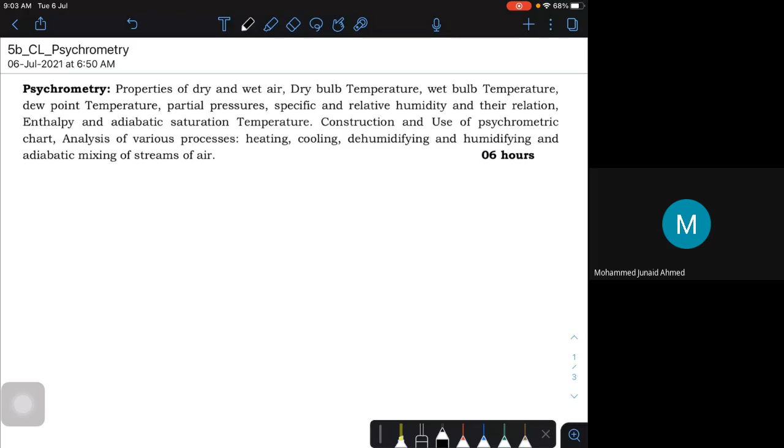Sir, air conditioning is reducing the temperature of, say, a space like a room; I think it has to do with the humidity, but I'm not exactly sure. Okay, fine. Maybe you are partly correct. Let me put it like this. What is air conditioning? Let's try to define it as simply as possible. Some important definitions. Air conditioning: what is it?

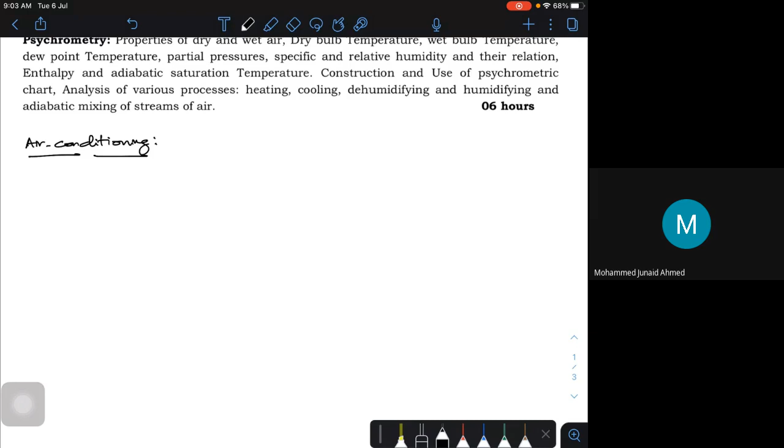It is the method of controlling the temperature, the first part. Then humidity, the second part, and also the purity of the air, how pure it is. You might have seen that sometimes we add something to purify the air. And the motion of the air, that is, the movement of the air.

Where exactly? In an enclosed space, independent of outside conditions. Look at this, I have tried to define it as simply as possible. If something is happening outside, it should not have any effect on the inside temperature or inside conditions. Many feel that only controlling the temperature is air conditioning. That is maybe partly true.

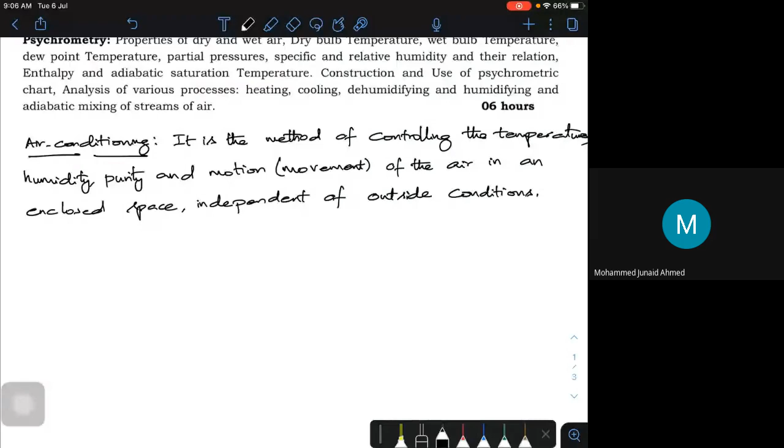For example, if I sit in one corner of an air conditioned room, the cool air should not be confined to that particular spot. The air should move throughout the room, independent of the ambient or outside conditions. All these things put together we call air conditioning, and the method of doing this is called psychrometry. So what things does an air conditioning system need?

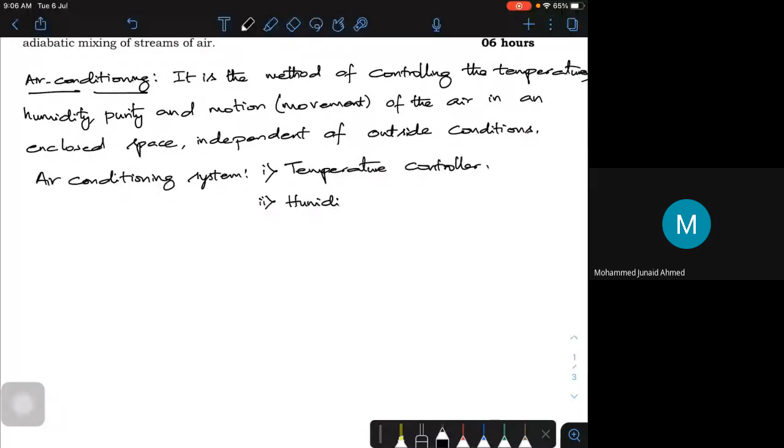An air conditioning system should have, first, a temperature controller, and second, a humidity controller. All these devices should be installed. Then air movement: an air movement controller, some kind of blower or fan. For purity, what do I need? Some kind of air filter for cleaning and purification.

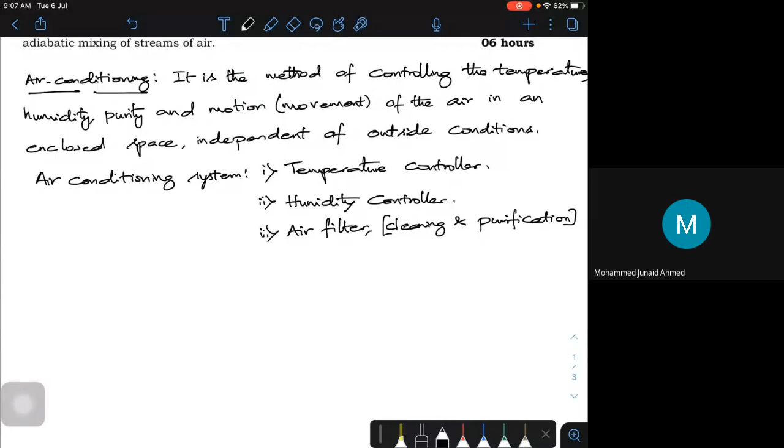A complete air conditioning system should have all this. Only then can I feel the comfort of that particular place. That's why air conditioning is called human comfort. It's not for everyone; whoever wants it can have it. Now let's look at the air conditioning system. I have a simple picture here of a simple air conditioning system.

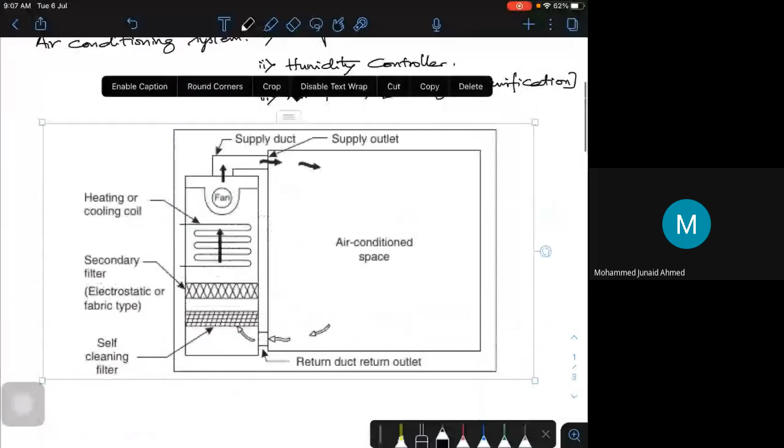Look at this. It's a simple air conditioning cycle. Look at the arrows. It has a filter from where air will enter. But one filter is not enough; it has to be filtered further. Further filtration is required, that's why I go for a secondary filter.

It may be an electrostatic type, or it may be a fabric kind of thing which will try to remove as much dust particles as possible.

Then the purified air will go through a coil. Inside the coil will be the refrigerant. Usually earlier we used to use R22.

Now there is a fan. The cooled air is taken through a fan and given to a duct, and the ducts are placed inside your air conditioning space. This is a simple thing.

Then you are not allowing that air to escape. If you try to allow the air to escape, you pay the penalty, you have to pay more power. What we try to do is take the same air through the return duct and do this cycle again and again.

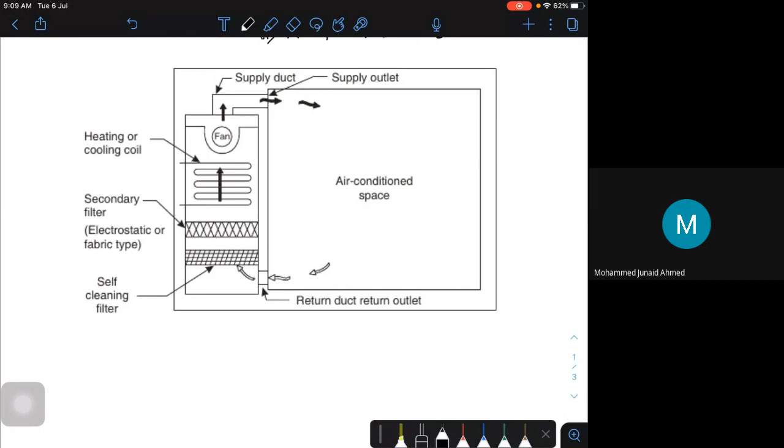If I want to explain this air conditioning cycle, this is a simple air conditioning cycle. Let me explain this. A simple air conditioning cycle. These are its components.

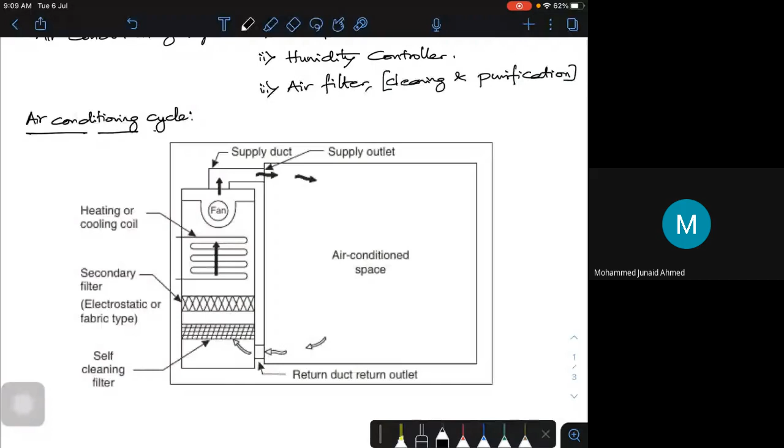The fan forces the air. We have a small fan which forces your air into the duct. That is connected to, maybe you have several openings in your room. These openings are called, if you have visited any centralized air conditioning plants, terminus or terminals or air conditioning duct outlets. So the duct was it.

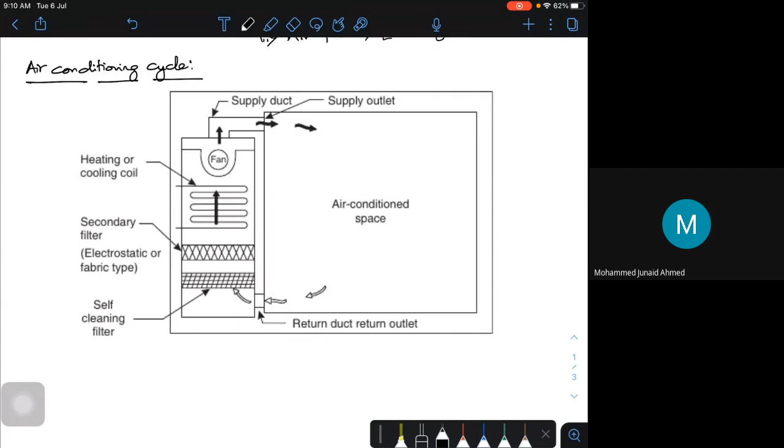That's why whenever we go for air conditioning systems, our ducts have to be properly designed so that there is no obstruction to the air. The air has to be easily circulated. So if you have a large room, I should have enough duct spaces so that local cooling doesn't happen. The movement or motion of the air in that particular space is more important.

So what are the things which are important? The filters, which purify your air again and again repeatedly. That's why if I have an air conditioning system at home, after 3 or 6 months, I have to put a filter. I'm going to change the filter. They are something like consumables actually.

These filters, nowadays made of nano carbon kind of air filters, after a particular amount of time or particular cycles of use, these will wear, and the air filters have to be replaced again and again.

Now when you come to the heating or cooling coils, if I'm in a colder country, I will go for heating, because of the room conditions. If I want to maintain the room temperature around 20 to 22 or 25 degrees Celsius, and the outside temperature is 45, the air has to be cooled. If the outside temperature is minus 2 degrees or so, the air has to be heated. That's why air conditioning is not only cooling, but since we are in a tropical country, we are going for air conditioning as cooling.

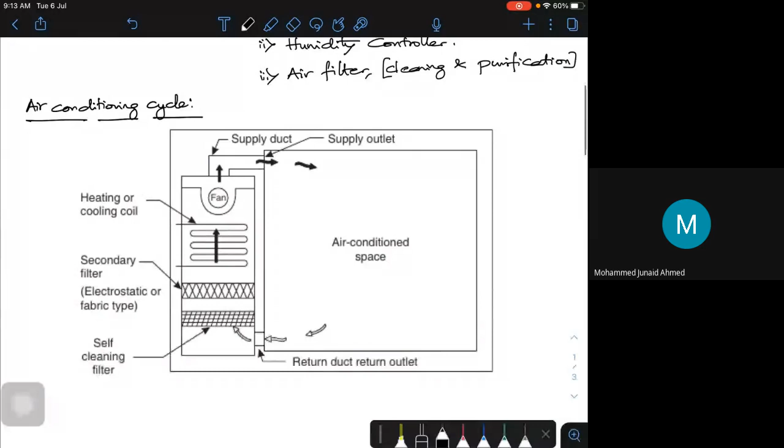Once you see this kind of air conditioning system, you need to know certain definitions used in air conditioning. One such definition is dry air. We all know our air is made of nitrogen and oxygen, maybe 78% or some percentage, and a small percentage of other gases also.

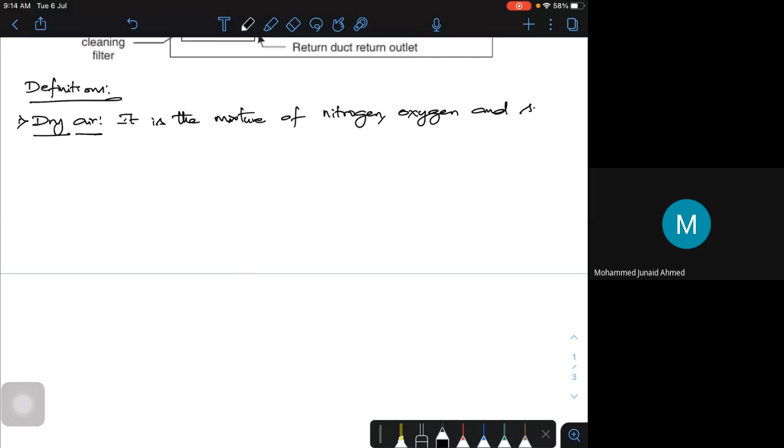Let me define it: it is the mixture of nitrogen, oxygen, and a small percentage of other gases. Now, when we speak of dry air, is it possible for us to look at wet air or moist air?

So you have dry air, and you have moist air. What is this moist air actually? Moist air means it is a mixture of your dry air plus the vapor, that is water vapor in it. The dry air consists of a fixed portion of the air, while the water vapor is one which may vary, because the percentage of water vapor can vary. These things lead to what is called humidity.

If you understand moisture properly, then you will be in a better position to understand your humidity.

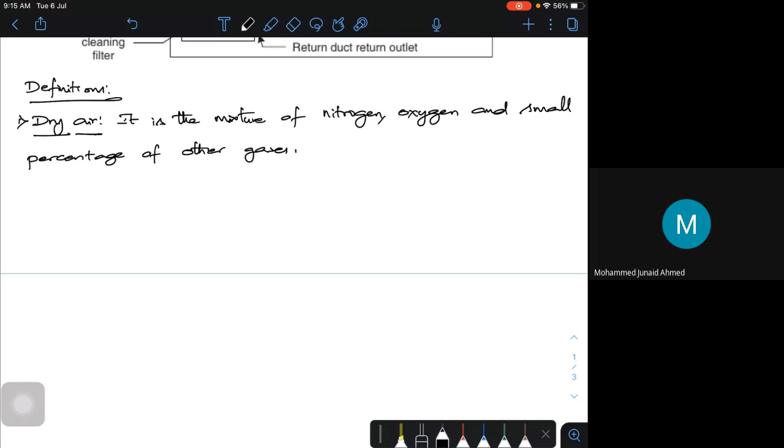Okay, so you have dry air which is a mixture of all those things. Now, when I speak of moisture, it means the mixture of dry air and suspended water vapor or water particles. Let me write that. Okay, second definition.

Moist air, it is a binary mixture of dry air and water vapor. This water vapor is suspended, it's a suspension. So water vapor is called as suspension of water vapor.

See, the dry air constitutes a fixed part, while the water vapor is a variable one. Why is it variable? Because the suspension of water vapor will vary.

See, if I am in Chennai, this suspension of water vapor will be different. If I'm in Mumbai, it will be different. If you are in Bangalore, it is different. So from place to place, suspension of water particles will vary, and the air which consists of dry air and water vapor is called as moisture.

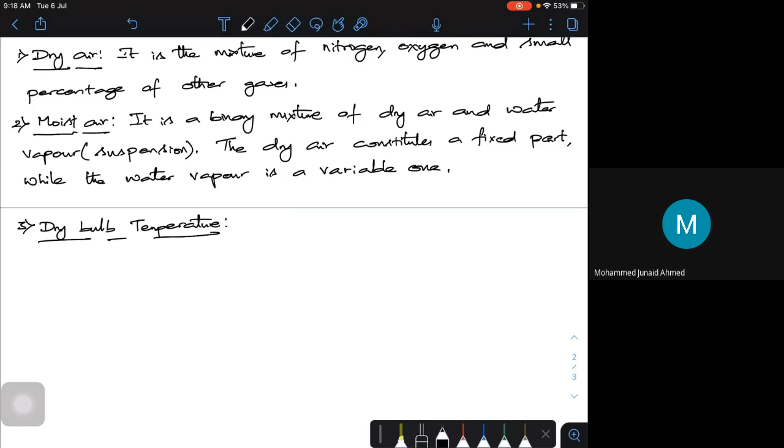Now, I'm going to expose the air to a freely suspended thermometer. If I simply expose a freely suspended thermometer, say for example, this is my room, and I'm going to freely suspend a thermometer like this, simply a thermometer. So the temperature measured by a freely exposed or freely suspended thermometer in a room, whatever temperature it measures, that's the dry bulb temperature.

But still, this kind of free suspension, that's the actual simple definition. But what will happen is these kinds of thermometers may give some errors. Why is that actually? Because we all know, if you go to a heat transfer course, even at low temperatures there is a little bit of radiation.

We call that radiation, and that may lead to moisture, maybe vaporizing of water. So what we need to do actually, if this is my thermometer, I need to put a shield to it. We call that a radiation shield. So if you are able to put a radiation shield to your thermometer and measure the temperature, that will give an accurate dry bulb temperature.

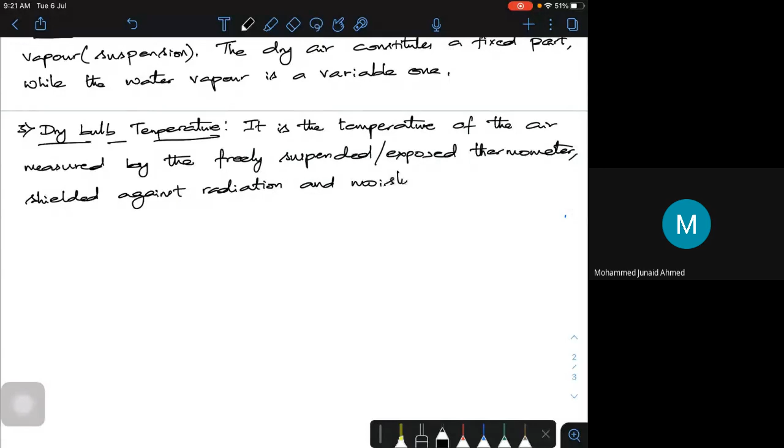It is the temperature of the air measured by the freely suspended or exposed thermometer, temperature of thermometer shielded against radiation and moisture. And this is called dry bulb temperature.

But sometimes you might have seen in any of the laboratories two thermometers. One thermometer, which you see, will measure the dry bulb temperature. And you might have seen another type of thermometer where there is a small cotton wick or something attached to it, and it is inserted and soaked in water. That means one, to the right hand side, without any wick, is measuring the dry bulb temperature, which is shielded against radiation and all. Then the other one, soaked with the wick or cotton, is going to measure what is called another type of temperature.

We call that wet bulb temperature. And what is the advantage of this actually? When I try to put the wick to the thermometer, it is going to directly measure the quantity of moisture in the air.

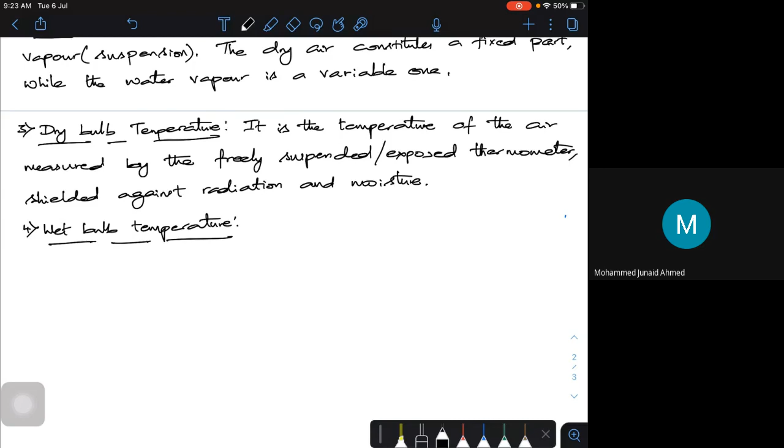Okay, so now what is that actually? The other type of temperature I told you about is the wet bulb temperature. We call that wet bulb temperature. What is it? It is the temperature measured by the thermometer with a wick, which can be made of cotton or a simple thread, whatever it may be. The wick is soaked in water, which is directly a measure of the quantity or amount of moisture in the air. Let me write that down.

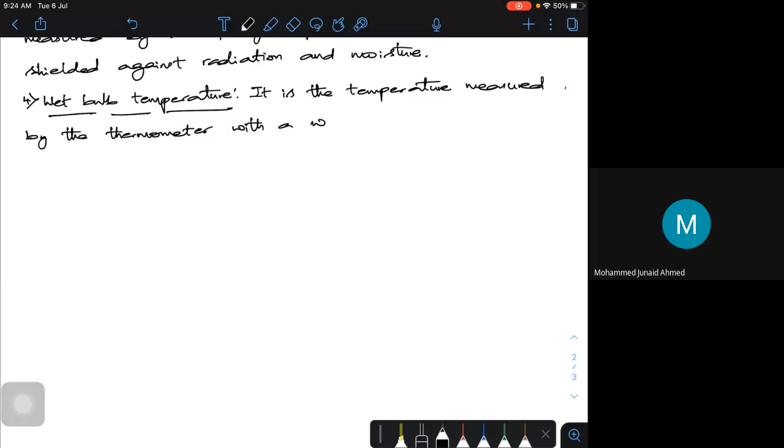It is the temperature measured by the thermometer with a wet wick. Usually this can be cotton or a small thread, whatever it may be, soaked in water, which is a measure of the amount of moisture in the air.

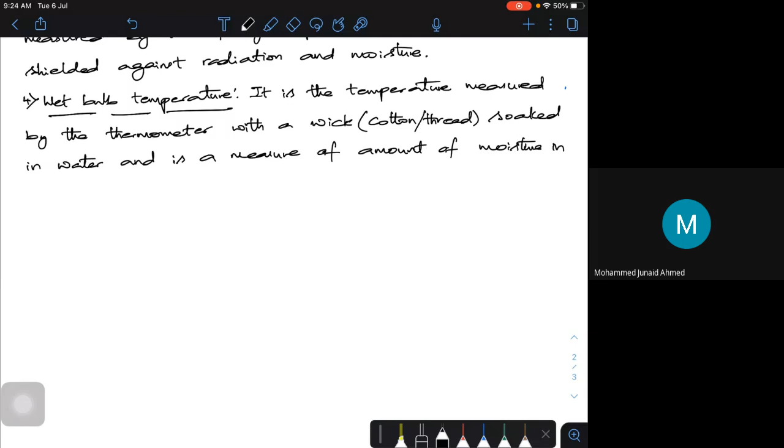So we have defined two definitions: what is the dry bulb temperature and what is this wet bulb temperature. Now, very closely, this dry air and water vapor, we call that dry air and water vapor, they are all like ideal gases, with some kind of partial pressures. If you have studied partial pressures in basic thermodynamics, they are all ideal gases, meaning they behave ideally like an ideal gas. Even though the partial pressures are very low, even though the pressure exerted by this water and the pressure exerted by your dry air are very low partial pressures, they can be treated as ideal gases. They belong to the category of ideal gas, not real gases. Just some extra information.

Okay, now there is one more definition: what is called the dew point temperature. We call this the dew point temperature.

You might have seen that sometimes, if you have a car or something, in the morning you see some kind of water deposition, deposition of water vapor on the glass. Why is it so? Or maybe sometimes we blow air onto a mirror, and if you try to do it, it shows that particular water vapor. Why does the deposition take place?

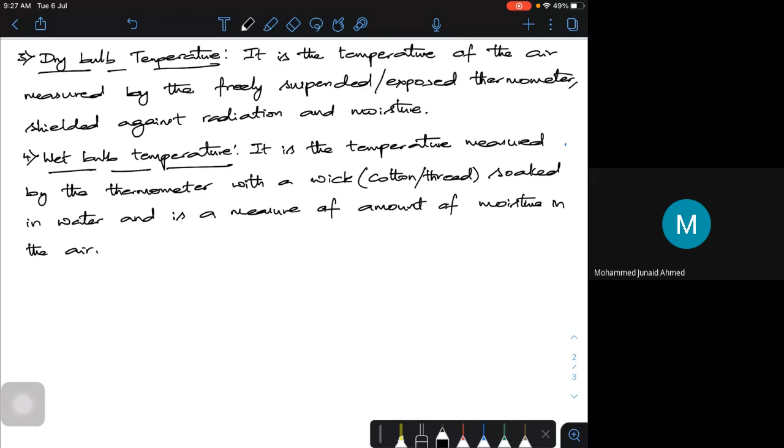Now, when I speak of this kind of temperature, what is called dew point temperature, this is actually T suffix D, the dew point temperature. So it is the saturation temperature.

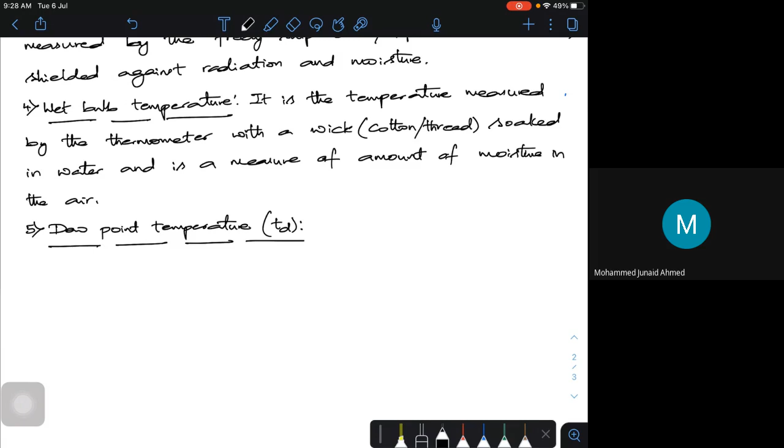It is nothing else. It is the saturation temperature at which the air and water mixture, when cooled at a given pressure, the water vapor will try to condense on the surface. Whatever suspended water vapor there is, I am simply trying to cool the surface. Simple logic. You see, something like this.

So I have a surface, look at this. This is at some saturation temperature. So this may be at a temperature, the saturation temperature, look at this. So what will happen? There is your air moving like this. This air will go and deposit on it.

When I try to cool it, simply it will go and condense on it. Whatever condensate we see, the droplets of condensation on the surface, we call that condensate or dew. The temperature at which this phenomena happens is called the dew point temperature. This is what most of us see during the winter and all, we see this activity.

Okay, let me write that. It is the temperature.

Okay, the mixture, that is air mixture. The air mixture when cooled, maybe I have to do it at constant pressure. Why do I have to do it at constant pressure? Go back and see what we discussed during the pure substances. It has to be on the constant pressure line.

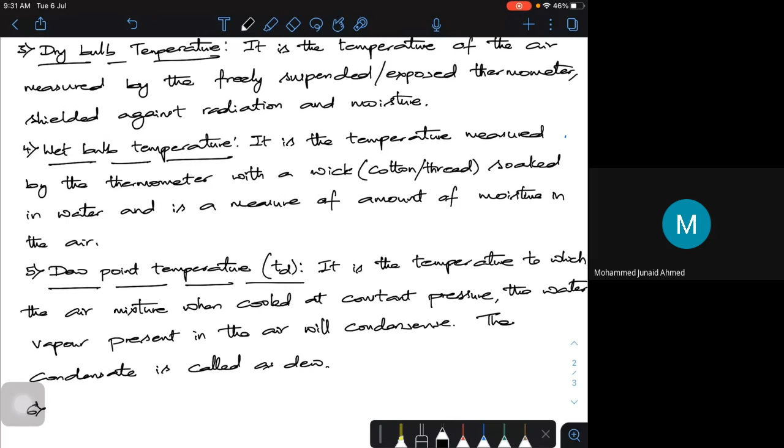Now, if you go back to your basic thermodynamics course, you might have studied ideal gases. When I was discussing dry bulb temperature or wet bulb temperature, I told that your dry air as well as your water vapor both will behave like an ideal gas. So I should know something about partial pressure: Dalton's law of partial pressures.

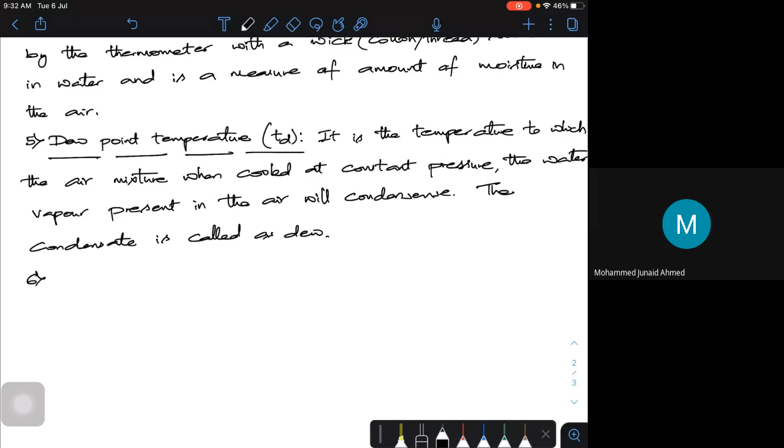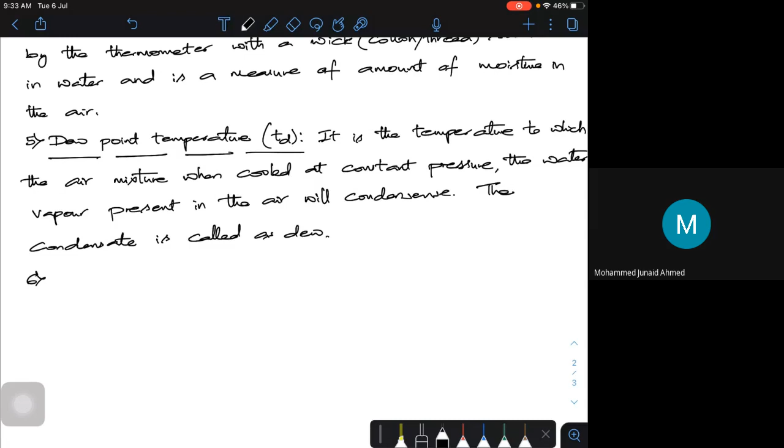Now, in psychrometry, instead of directly referring to the ideal gas, we say it is the mixture of air, or ideal gas mixture, or air mixture. That's the only difference. So what is this gas mixture? We have air, we have water vapor. Let's write partial pressure, as per Dalton's law.

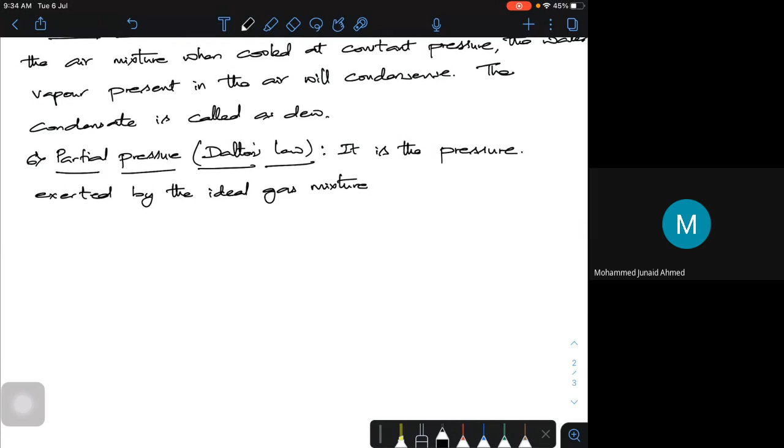As per Dalton, it is the pressure exerted by the ideal gas mixture, that is the air mixture, and is equal to the pressure at the same volume and temperature.

It is the pressure it would have exerted at the same volume and same temperature. Sometimes they call it a given volume and given temperature. So under this condition, what will happen?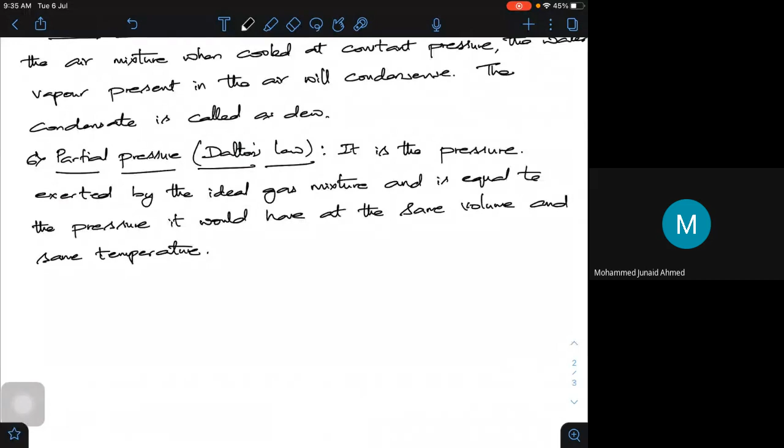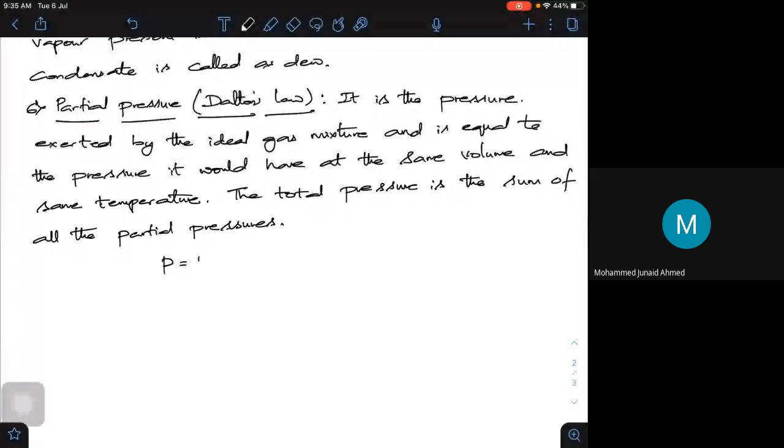Therefore the total pressure for the psychrometric condition is the sum of all the partial pressures. If I take the total pressure as P, then it is the pressure exerted by the air plus the pressure exerted by the vapor.

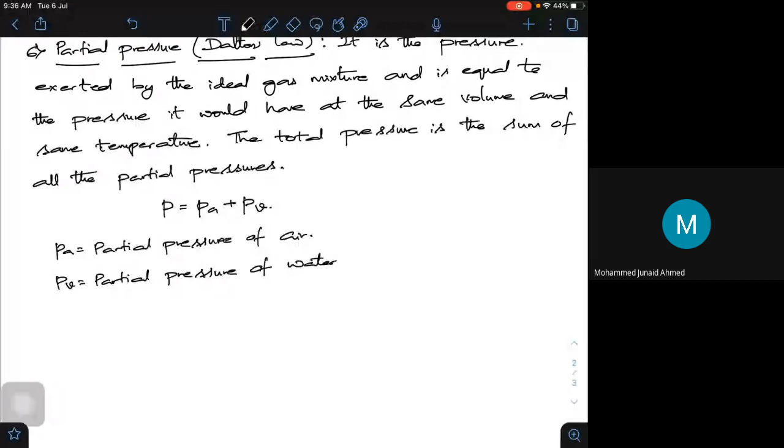Where Pa is the partial pressure of air and Pv is the partial pressure of water vapor. So this is as per Dalton's law.

Similar to partial pressures, we have mass. Based on the mass of water vapor and the mass of air, if I take a ratio, we end up with humidity: specific humidity, omega. If you have seen air conditioning charts, you might have seen omega. It is called humidity, specific humidity, absolute humidity, and some books call it humidity ratio.

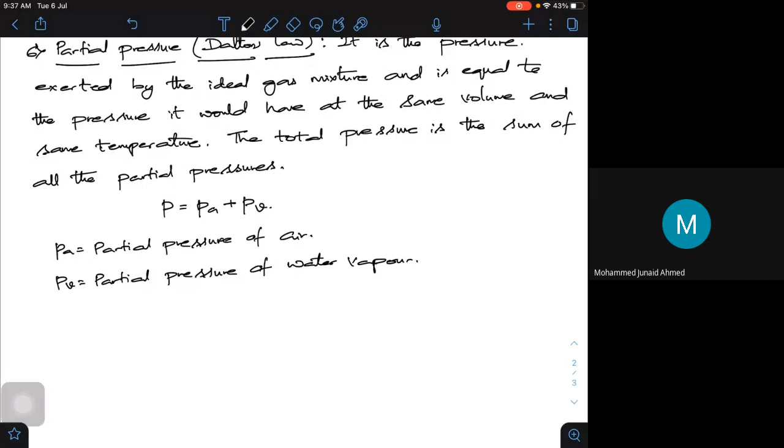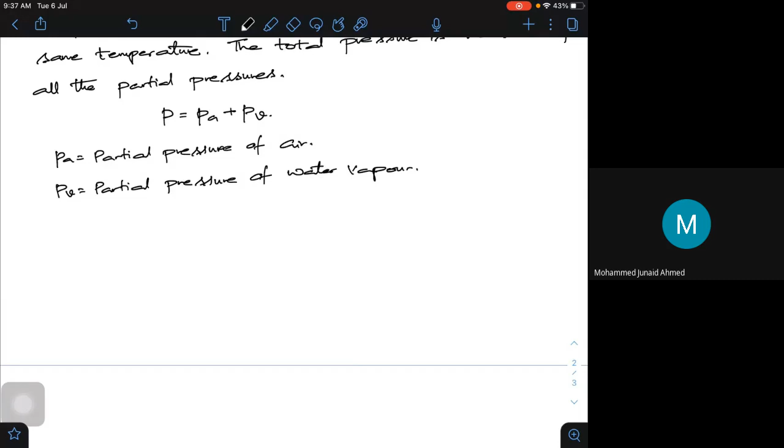What is it? It is the ratio of the mass of water vapor to the mass of dry air in the given mixture. If I take that ratio, I get specific humidity, or simply humidity, absolute humidity, or humidity ratio. Let me write that. Seventh definition.

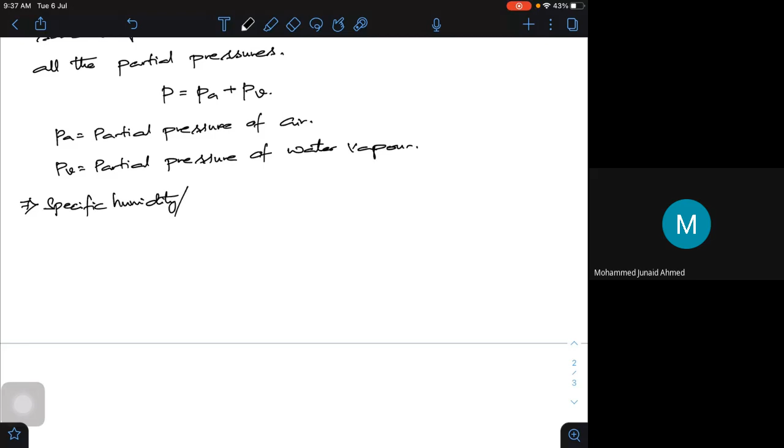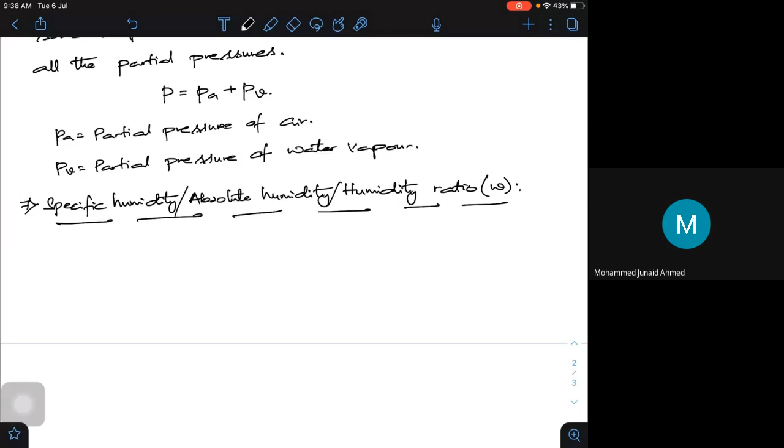Specific humidity, or absolute humidity, or humidity ratio, is given by the symbol omega. So it is the ratio of, okay, let me write that. It is the ratio of mass of water vapor.

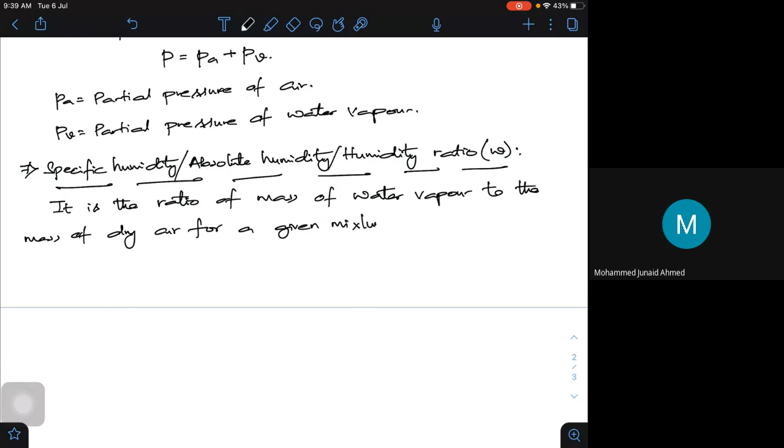It is the ratio of mass of water vapor to the mass of dry air for a given air mixture, whatever it may be. Then mathematically, I can write it as omega is equal to mass of vapor by mass of air.

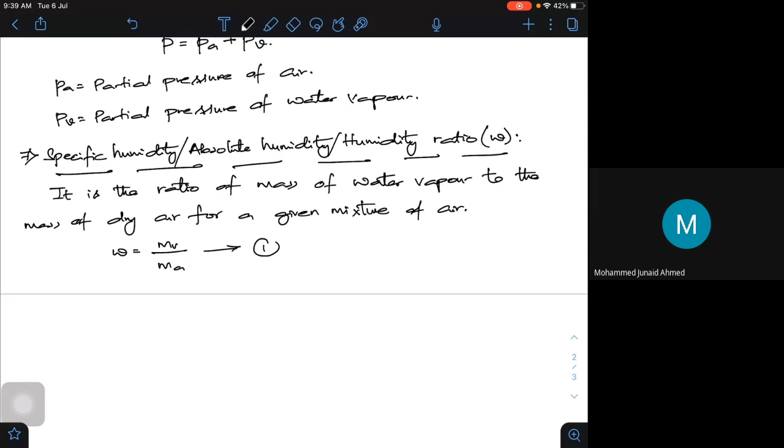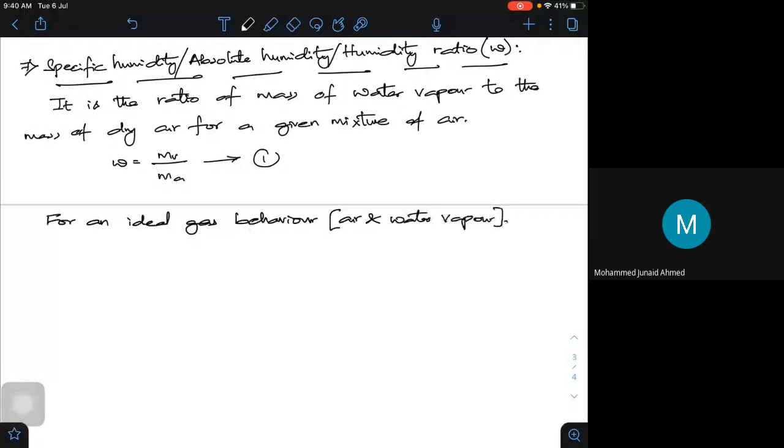So this is a simple definition. Now, as I told, both air and water behave like ideal gases. So for ideal gas behavior of both air and water vapor, I can modify this equation. If both behave like an ideal gas, what is the equation I have? PV is equal to mRT.

For an ideal gas we have PV is equal to mRT, or I can write m is equal to PV by RT. This equation is known. I will substitute for mv. mv is equal to Pv into V by Rv T. But remember, V is constant and T is constant; both are at the same temperature and volume. Only pressures are varying, and your constants are different.

So Pv into V, let me write a bigger V so there won't be any confusion: pressure of vapor into volume divided by R of vapor into T. Then for the air, this will be pressure of air into volume divided by R of air into T. Now, if you closely look at it, I need to get it only in terms of your R.

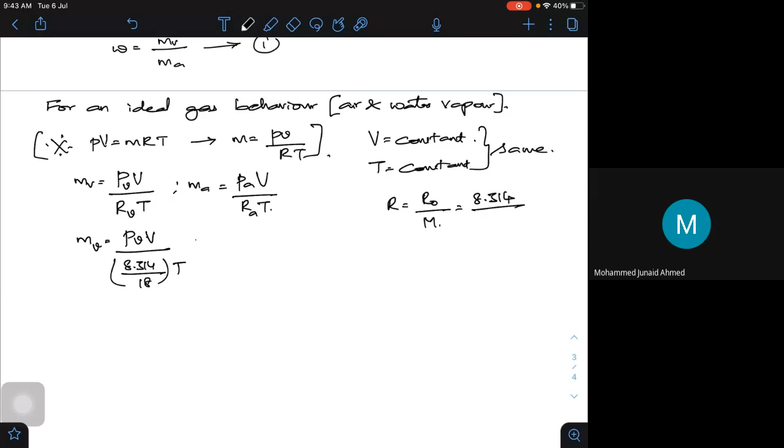So I can write mass of vapor as Pv into V divided by 8.314 divided by 18 into T. V and temperature will simply go off. Then mass of air is equal to pressure of air into volume divided by 8.314 divided by 28.96 into T. Now I'll substitute for mv and ma in equation 1.

If I do that, volume and temperature will go off. So therefore omega becomes Pv divided by 8.314 divided by 18, divided by Pa divided by 8.314 divided by 28.96.

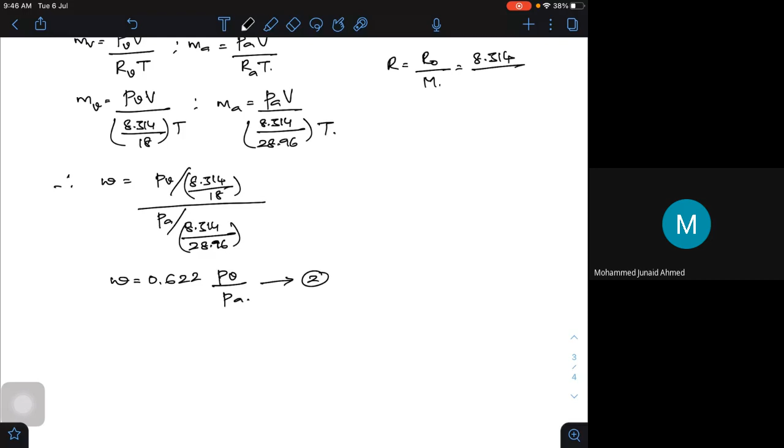Using this, I will define one more thing, which is called relative humidity, which is completely dependent